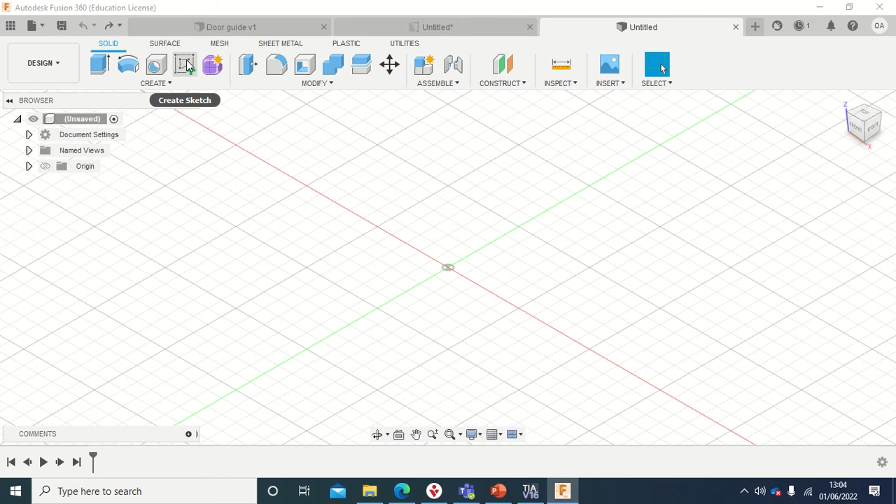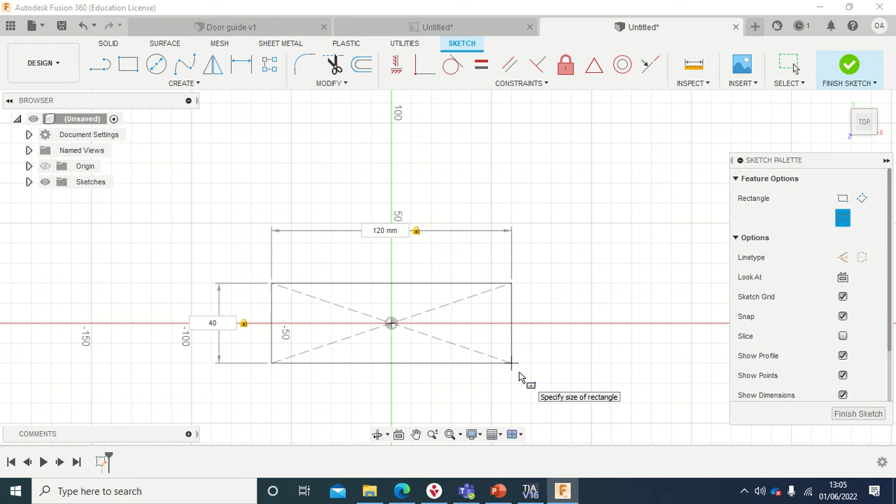I'll click on create, select the top plane, and go for rectangle, but I'll pick the center rectangle. I'll sketch here and draw this, and the length is 120. I'll press the tab key and put 40 here, then press enter.

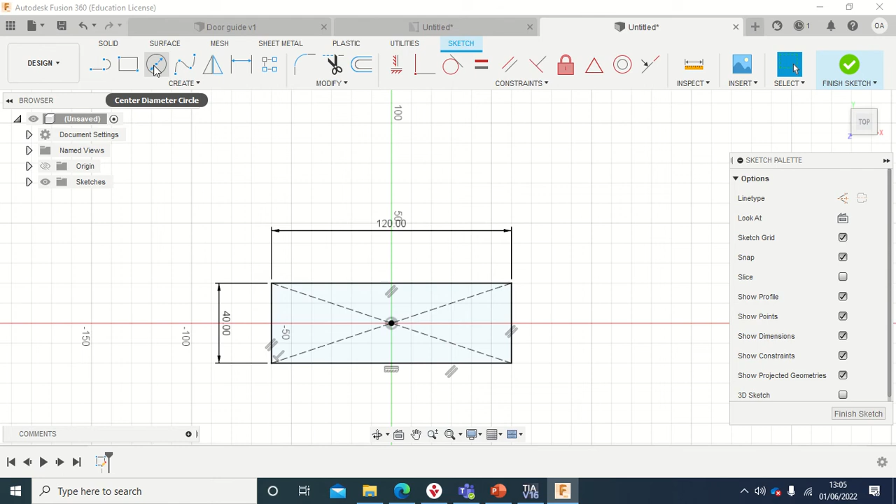Once I've got this, if we go back to the drawing, you will see that this box I've already drawn has a radius of 20, meaning the diameter is 40. So I'll get the circle command, sketch here, and draw a circle of diameter 40, which will be this one here.

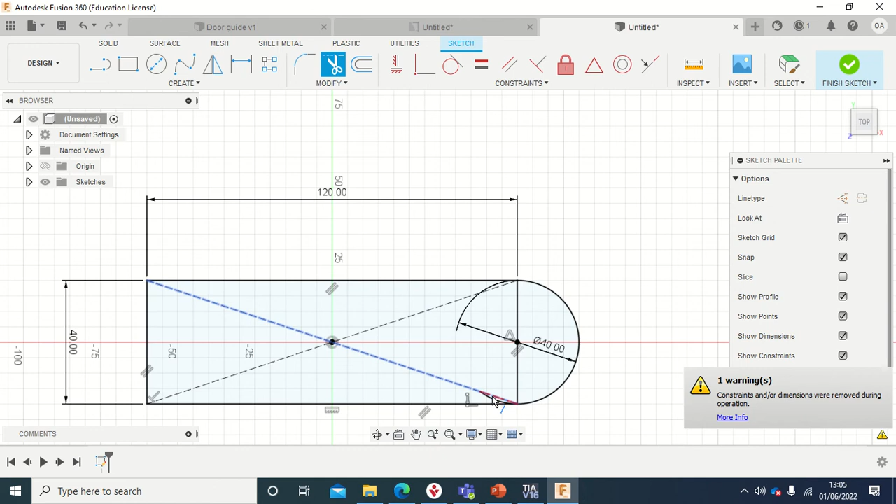I can trim off this bit for now, because I wouldn't need this. Then there is another box there. Let's go back to the orthographic view. This box here has a width of 20, meaning it's offset from the main box by 10 at the top and 10 at the bottom.

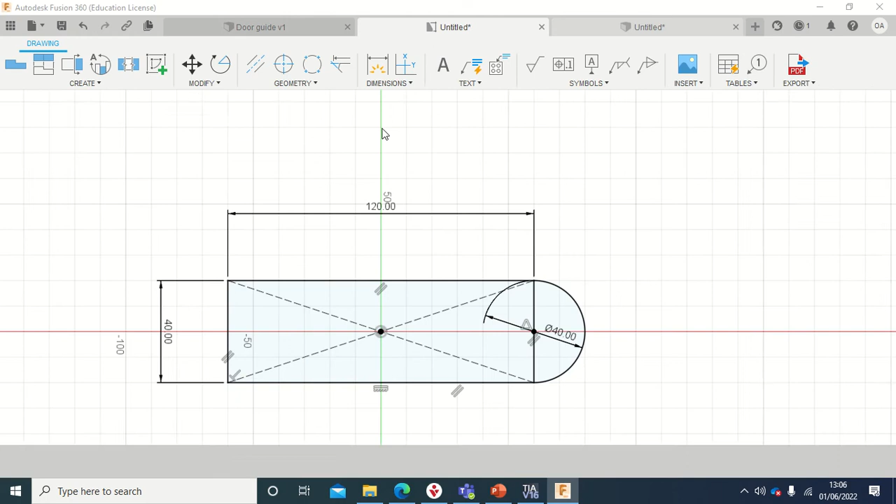So I'm going to go back to the drawing and offset this by 10. I'll use the offset command: click on this first, then use offset, and take it down by 10 millimeters.

Then another thing I will do is repeat the offset command. I'll select this line first, and then put in 10 millimeters, and that will be okay for me.

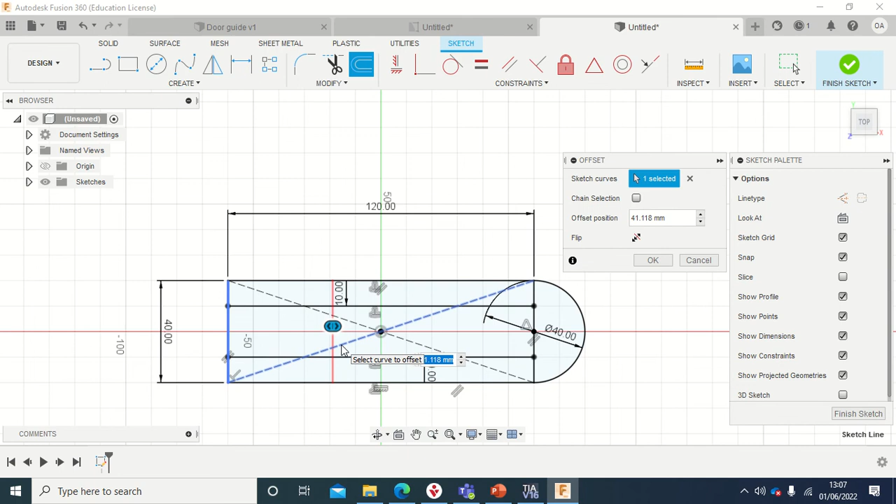Also, this base of the rectangle is 40 millimeters from here, because the length of the inner rectangle is 80 and the length of the outer one is 120, so the difference is 40. So I'll select this line here, click the offset command, and move this by 40, then press enter.

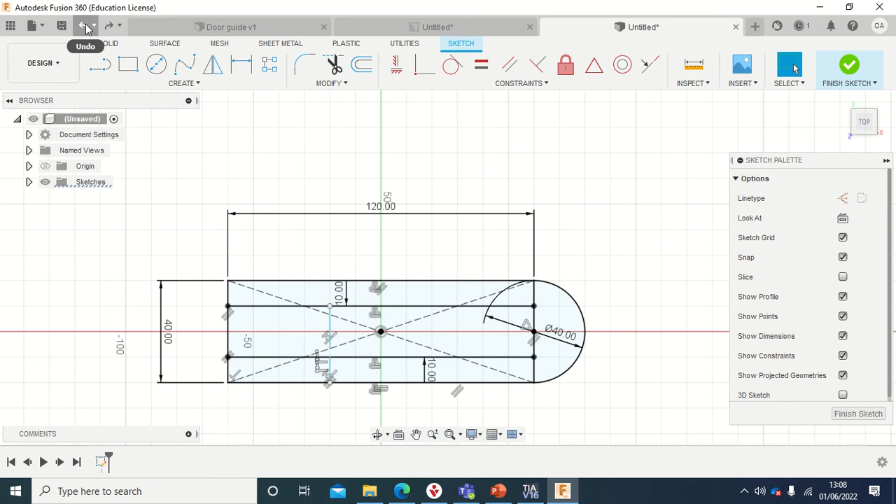So what I've done is I've got this shape. Next I need to trim it off. I'll trim this bit off, and that bit off. I have to undo, something went wrong there. So trim that bit off, and then this bit, that bit. Now I've got the shape.

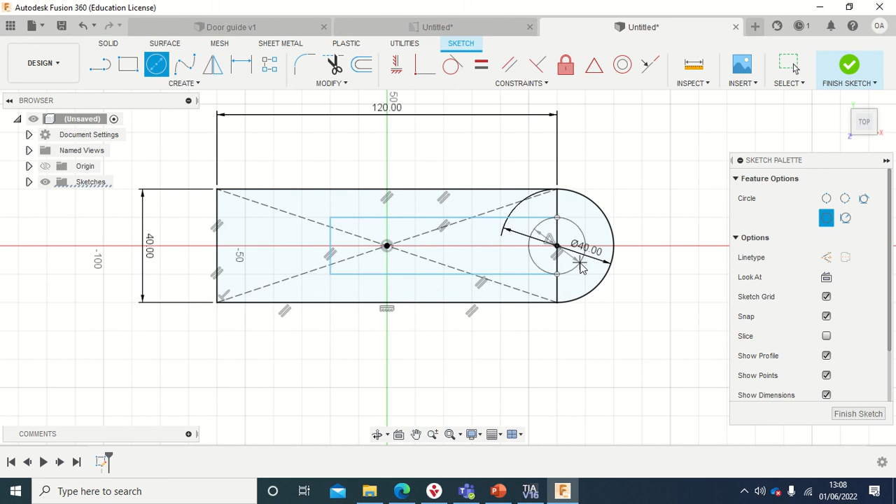Now I'll go for the circle command and draw a circle of diameter 40. I can trim this off too, and trim this bit off here, that bit off, that bit off. So I've got this nice shape.

Now let's go back to the drawing. Here is 40 and the overall width is 70. So 70 minus 40 gives us 30 — that is from this end here to that end here.

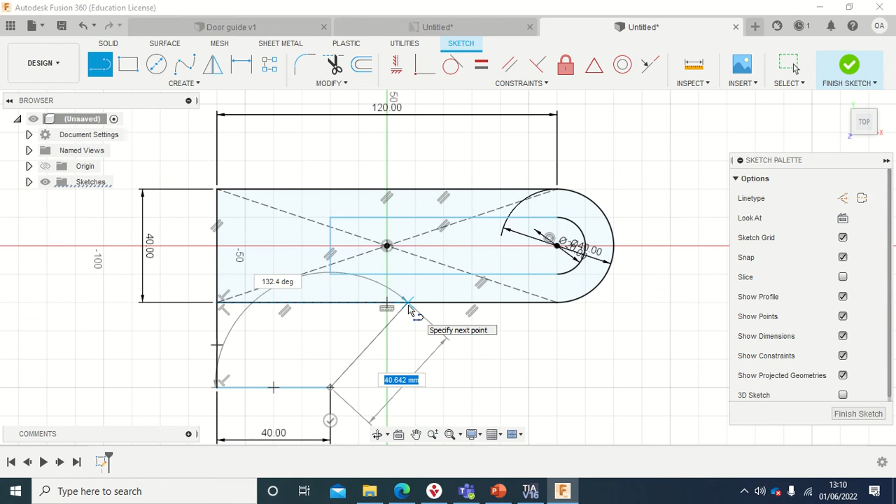So I'm going to get a line command and draw 30, 40, and then take it that way up. I'll go down by 30, press the tab key, draw and take it this way 40, press the tab key, and take it all the way to somewhere here. I'm not sure, but I'll just click.

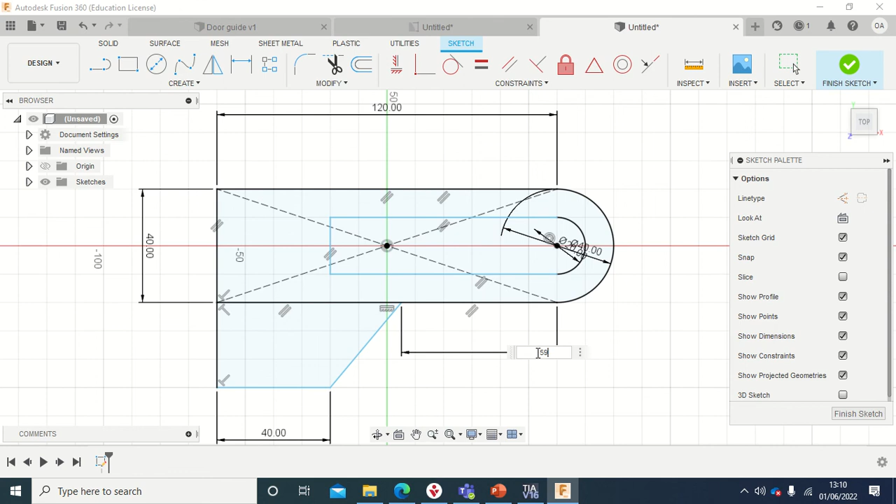Let's go back to this drawing. From here to there is 50. So I'll go back here, pick the dimension command, click here and there, and put in 50.

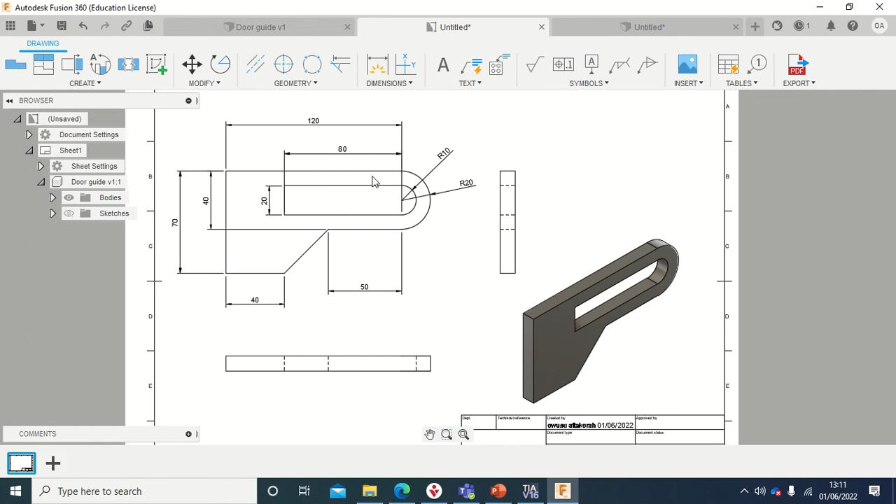So I've got that done, and let's look at the shape once again. Here there isn't anything, and there isn't anything there. I can show you the drawing from here — there is nothing in here. So I'll just trim this bit off with the trim command, and I've got a shape now.

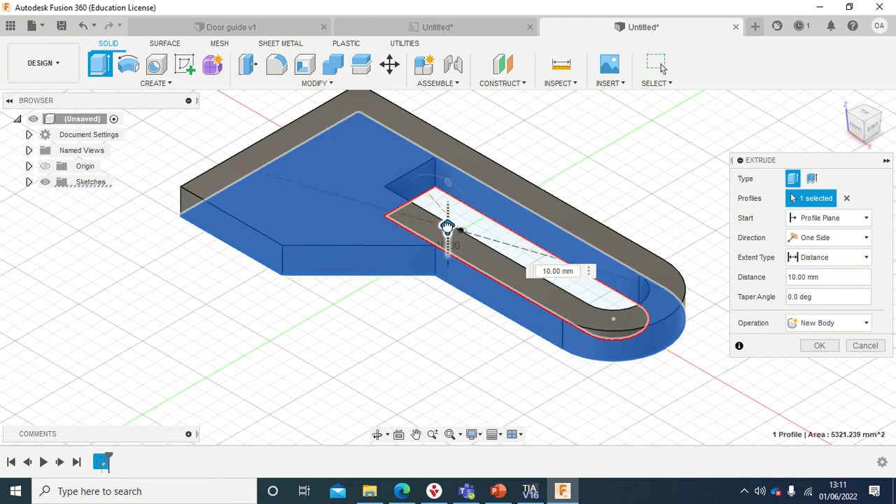Everything looks okay, so I'll finish sketch and click the isometric view. So I've got this now. What I'm going to do is extrude it by 10 millimeters up, and it's 10 millimeters, so I'll click OK, and this is done. We've got the door guide nicely done here, as it is right here.